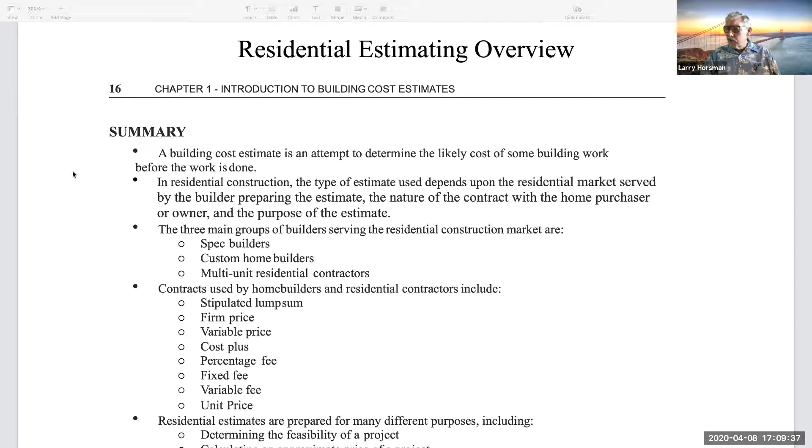Let's look at this residential estimating overview, hopefully you can see it. I'll be sending this out as a handout, so we're just going to go through it pretty directly. If you've got a small screen, you'll have a hard time. This came out of another book, the source is at the end, I believe. Yeah, Estimating for Residential Construction by David Pratt.

So not a brand new book. There's some web pages in here, some recommended resources. So NAHB, that's the National Association of Home Builders.

So what are we trying to do? Why are we estimating? It says a building cost estimate is an attempt to determine the likely cost of some building work before the work is done. So we're trying to predict the future. We also need to know why we're doing the estimate, because there's a lot of different reasons for preparing estimates. But we're talking primarily about residential construction.

In residential construction, the type of estimate used depends upon the residential market served by the builder preparing the estimate, the nature of the contract, and the purpose of the estimate. So we need to understand the contract because that establishes the rules under which we're going to have to work. Before you start any estimating, the very first question you should ask yourself is, why am I doing this? What's the purpose, what's the goal of the estimate? If you don't know what the goal is, there's no sense probably in proceeding at that point.

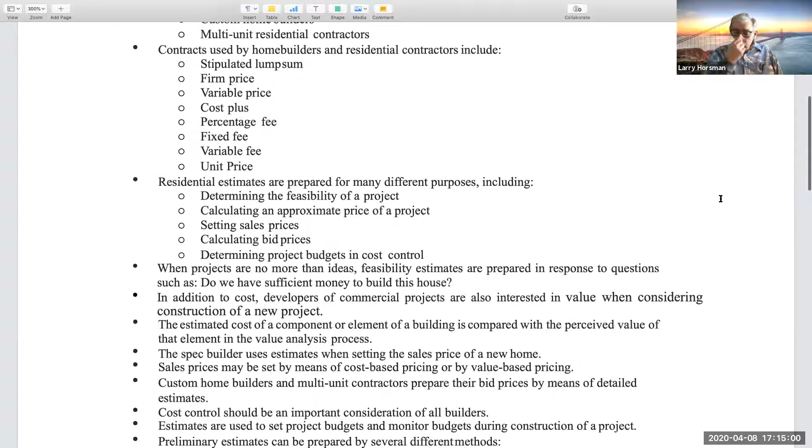So then we get to the heart of it. Besides the contract, why are we doing the estimate in the first place? Determining the feasibility of the project, we're not going to do a detailed takeoff. What we're trying to do is find out if the owner's budget and our expectation of project costs are anywhere close, and if they're not, there's no sense in going forward because the project's not feasible.

If we determine that the budget allowed and the expected cost, based on what information we have, look to be somewhat similar, then we can move forward and get into more detail.

Calculating an approximate price of the project is what we're doing sometimes, but that may be looking at options and methods. We may be looking at big elements, roof, walls, floor, concrete foundation, wood foundation, things of that nature. So trying to figure out a sales price. And how much do we charge for sales?

Anybody have an idea? 20%. As much as possible, right? Whatever the market will bear. So when prices are going up very quickly, it wasn't that long ago, prices have flattened out a little bit.

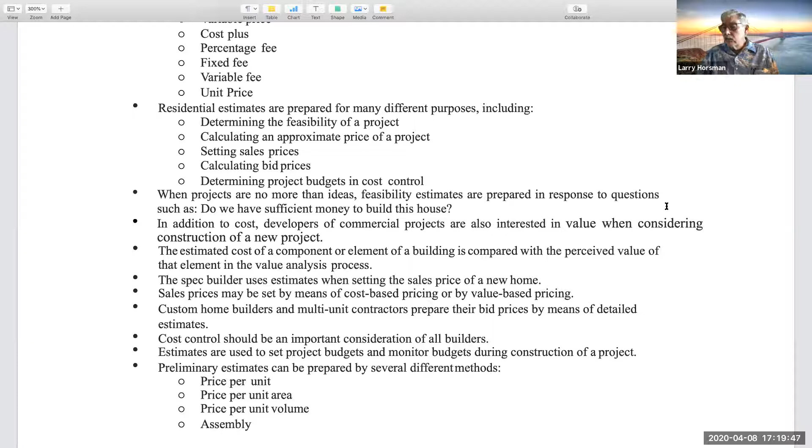So cost control, in order to do accurate cost control, we need an accurate budget. In order to do a detailed budget, we need to do a detailed takeoff. And preliminary estimates, though, we can do price per unit.

If I'm going to build a house, I know they're all about the same size. I just say, okay, X number of dollars. Price per unit area, often we're estimating on a square foot basis.

And I think here in San Diego, kind of average level, they're looking at construction costs about 150 bucks a square foot. Or if you're going to buy a house here in San Diego, I think it's around 250 because of the land prices a square foot. Over in El Paso, my daughter was buying a house. Most of the housing over there was running about $95, $100 a square foot.

Other places, it may be more. If you go to San Francisco, it's going to be a lot more. If you go to probably Alabama or someplace in the deep south, in most places, it'll be a lot cheaper. We can do price per unit volume, so they can have a cubic foot price.

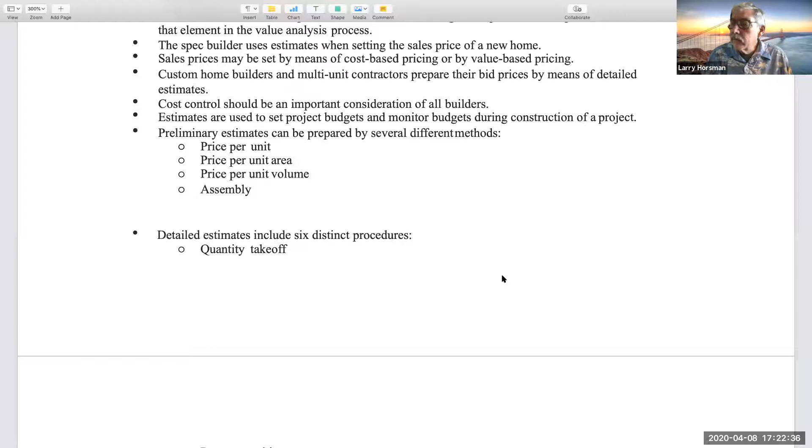So in order to come up with a cost and time, we need to know how much work there is. We need to know what the productivity is. And from that, we can estimate how much time it's going to take.

So once we've done the takeoff, we typically have a bunch of messy sheets. We have to recap the quantity. We have to come up with the material price, the labor price, and any equipment prices associated with that. Even on a residential job like these, there's a certain amount of things that just get lost, broken, used up that we have to account for also.

We have to price the general expenses. So that's kind of the job overhead. Do we need a trailer? Do we need a phone? Do we need a security fence? Do we have to have meetings once a week with the owner? Do we have to have meetings once a day with the owner? So those are general expenses.

And then when we're all done with that, we have to summarize, look at our overhead, and add some sort of a markup to make sure that we're getting the money that we want. So if we find out we can't earn the markup, the profit that we want, then we should probably go do something else, unless...

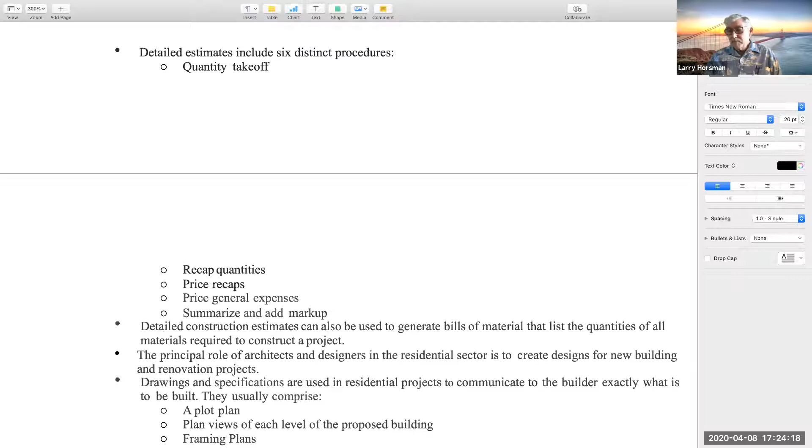There is an old saying, if you want to make a small fortune in construction building, the way to do it is to start with a large fortune and then go to work. And you can lose a little money on each job until you're broke. So, but not what we're trying to do.

So again, as part of the process, detailed construction— sorry, estimates. Guys. Hello? Do you have a question?

Detailed construction estimates, we're going to use those hopefully to generate bills of material that list the quantities of all the materials that we need to build the project. This is one of the reasons for doing the detailed takeoffs: everything that you forget or don't have a list for are things that probably won't get ordered and are going to cost you more money if you have to get them at the last minute or make an extra trip.

Much easier to have a detailed list of everything that you need, place the order, have it delivered, than to have to go pick up a whole bunch of odds and ends one at a time.

Architects and designers, usually—well, often—they're not particularly experienced in either ordering materials, doing quantity takeoffs, or cost estimating. But they create the designs for new building and renovation projects, drawings and specs.

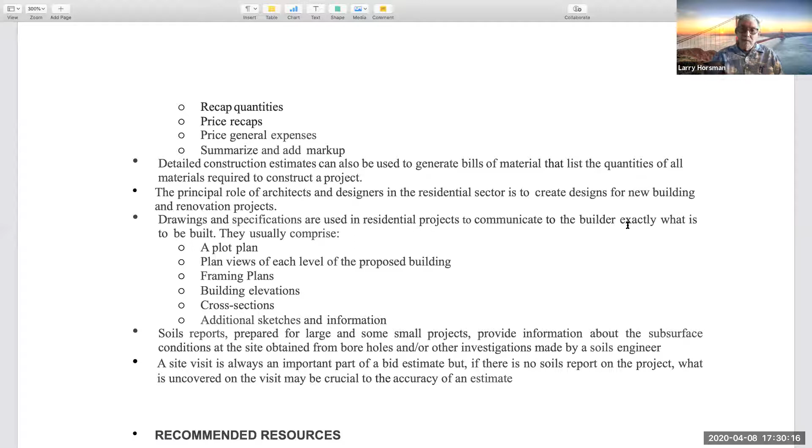How much does a soils report normally cost? Is it like $2,000? No, I'd say a cheap one is $3,500 to $5,000 typically. That's not that much time - somebody has to go do some research, meet with the client, put stuff together. Let's say you've got 40 hours in a soils report - somebody's got to type it up, you're running some lab tests. So 40 hours doesn't sound like a lot. You're probably paying an average of 100 to 200 bucks an hour for that, right? So 40 times 100 is 4,000, 40 times 200 is 8,000. And so people opt not to do that.

Now, sometimes the building department will come back and say, we know there's some sort of problem in the area, you're going to have to do a soils report. Or the inspector comes out while you're trying to get a foundation inspection and says, those big cracks in the ground, that's expansive soil - we need you to go get a geotechnical report for that. So it stops your job, plus you're going to have to do some extra stuff.

So getting out of the ground - now, on the other hand, the contractor may come back and file a claim for what's called a changed condition, saying, oh, you told me everything was going to be fine. Now we've got all this new information from a geotechnical report - or in some cases, because they only looked at 4 or 5 little spots on the lot, maybe they didn't find water, but where they're digging, they go down a couple feet and find a bunch of water. Now they've got to do something about the water in the trenches, and that can get expensive. If you're going to dewater and go to the Regional Water Quality Control Board, if you can't put it in a public sewer, it's going to cost you $30,000 to $60,000 to hire a hydrogeologist and figure out whether you can pump that water out and what you have to do with it.

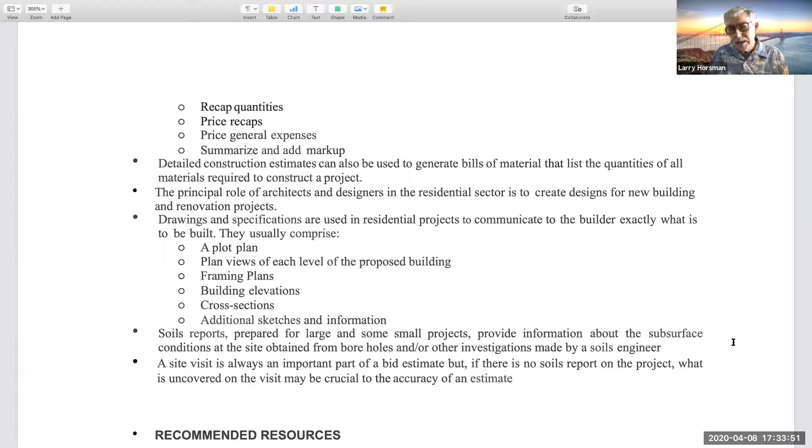They decided to proceed along. Last time I heard, they had abandoned the project. They'd spent a bunch of money, got a bunch of equipment out there, and found out there was indeed a big shelf of granite. It started at the surface and went down, so it blew the budget for the entire project, and they had to abandon it. So that's one thing you're looking for.

Another is looking for access. Can you get in and out of the site? Some places are fine when it's dry, but I've worked on jobs where the concrete truck came out after a rain like we had last night and sinks up to its axle, or rolls over. That can be a bit of a problem. You can have power lines that don't provide adequate clearance if you need a crane or something.

You may have drainage facilities that you have to deal with. There may be paving issues. So lots of problems only become evident after you do a little bit of research. Usually you have to look at the legal descriptions and look for easements, and there's a whole bunch of things that you may need to look at.

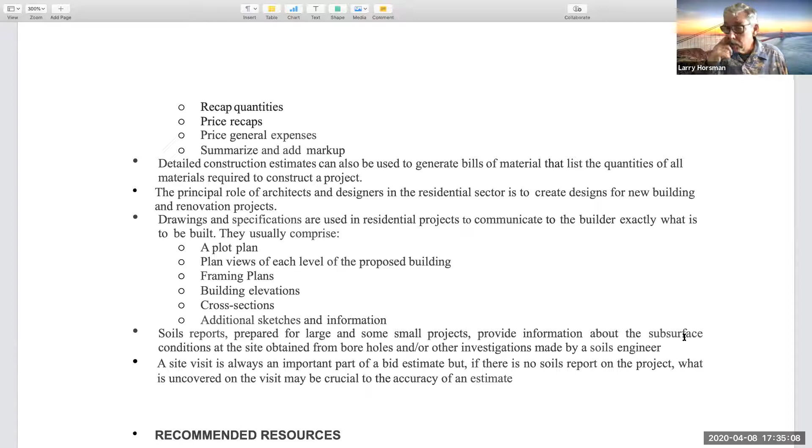And so that kind of puts a little bit of that, I think, in perspective. But the most important thing is, why are you doing the estimate? That's the first question you need to ask.

If it's just blue sky, we're not going to do a takeoff. We just want to know about how big, and does it make a difference whether you do 8-foot ceilings or 10-foot ceilings? Yay or nay? Yeah, because the higher you get off the ground, the lower productivity is. And also you've got 25% more surface area for the walls going from an 8-foot ceiling to a 10-foot ceiling. You'd be surprised at how much wall surface area there is in a typical house.

So does it make a difference whether you use tile or whether you use comp shingles? Yeah, tile is generally 2 to 3 times as much as composition shingle, although it's heavier, so you're going to need more structure. Although there are designer composition shingles that are very pricey.

How about a copper roof? Think that's cheap? Nope, that's very expensive. And you can't just get anybody to put on a copper roof typically. You need somebody who's experienced.

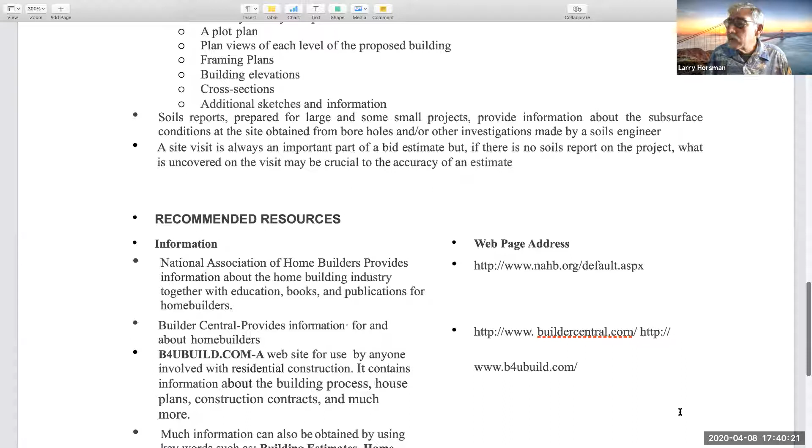But anyway, I'm going to send you a copy of this and I'll ask a few questions on it. The number one thing before starting any kind of estimate is: what am I going to use the estimate for? If you don't know what you're going to use the estimate for, I don't know how you can even start doing an estimate.

This class, though, focuses on quantity takeoff, because in order to start coming up with how much work and how much that work is going to cost, somebody has to do a detailed breakdown at some point. But if all you're going to do is conceptual estimating, you're not going to be doing any of this stuff—you're just looking at some very general parameters.

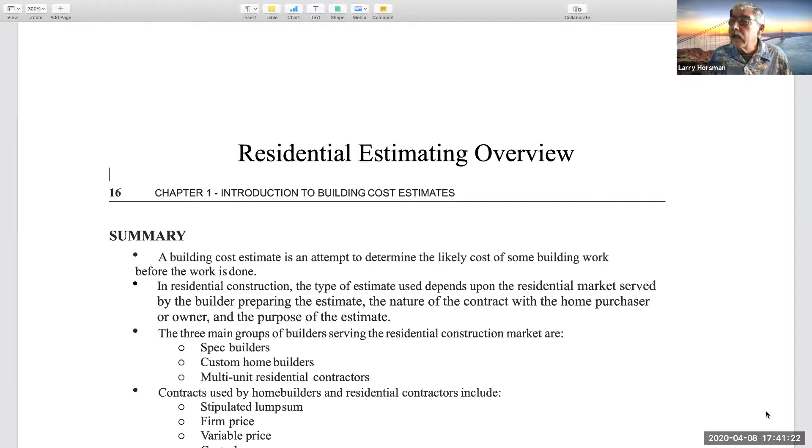So what we're looking at is fairly small. I don't know if that helps or hurts. We're talking about providing a little more structure, so I think I can get rid of that.

There you are. And we can look at—let's see if I can get my IPEVO up. So we'll go. Any questions? Anybody still awake?

I'm still awake. I appreciate that. Excellent.

Have we done a total cost for the foundation of the first house yet? I don't think so—I will put together a price breakdown for that, and then you can see if you agree or disagree. It'd be nice to know what the cost was to have a number. Yeah, I'll have to sit down and work on that based on the quantities, and you have to make some assumptions too.

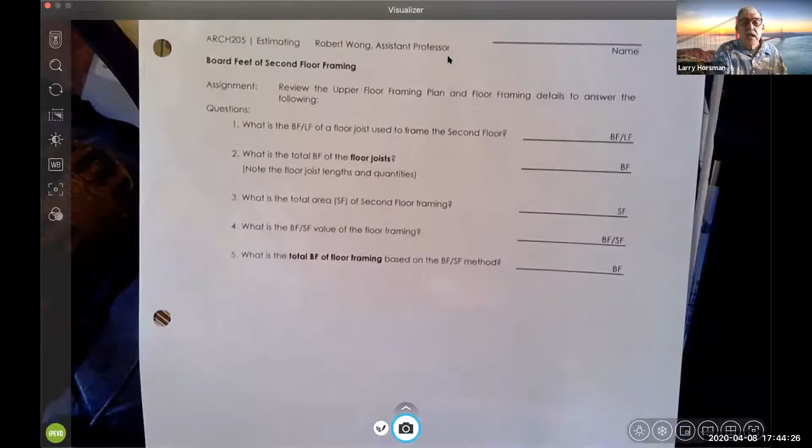So we did have this board feet of second floor framing, so I don't know if everybody's done that. We're gonna look a little bit at that.

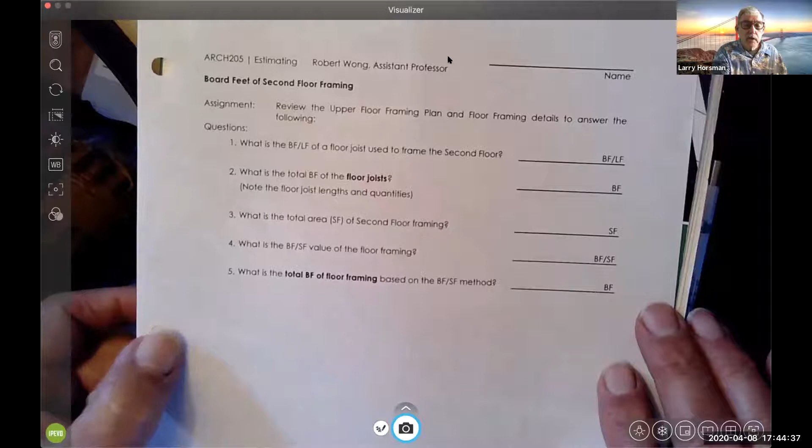Also, I brought this into class, and I'll put together a couple more handout things from this, but this is organized in a very similar way to your book. This is the standard estimating practice for the American Society of Professional Estimators.

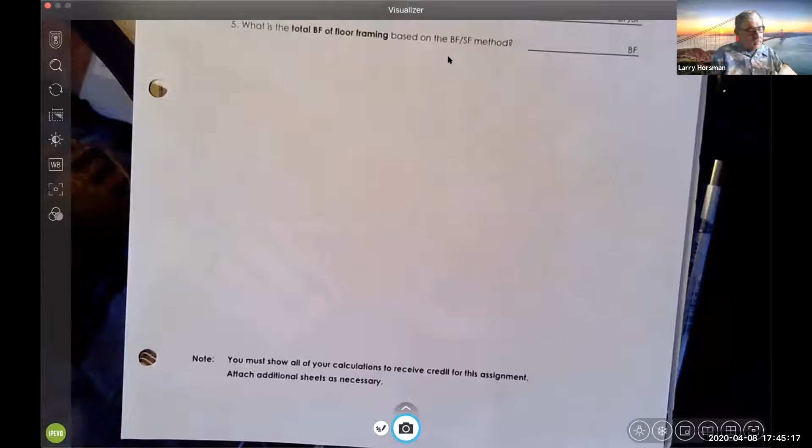Okay, can you see this sheet? Yep. Okay, hopefully—let me get this thing out, I've got something else floating on my screen if I can move it. Maybe there.

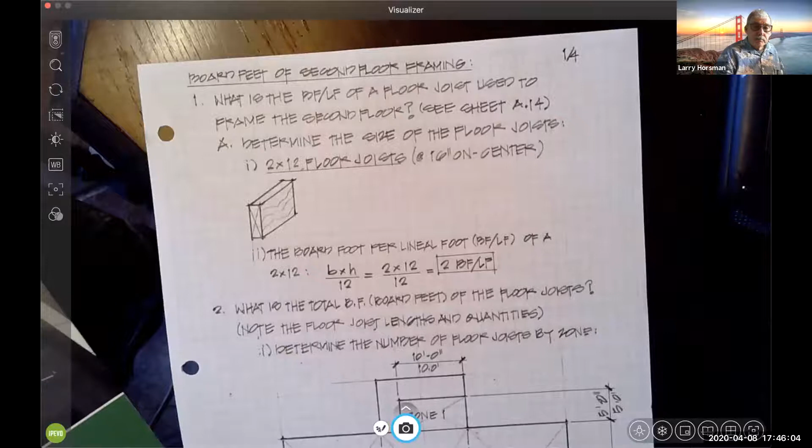This lag is starting to bother me a little bit. But this is board feet of second floor framing, a calculation associated with that other sheet I gave you.

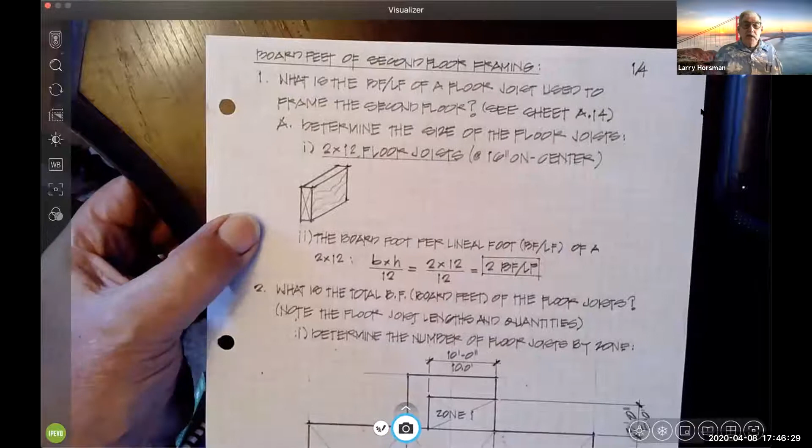So you see A there, determine the size of the floor joist. So our floor joists are, if we look at the plans - has anybody looked at those plans? Yeah, so if you look at the plans, we have 2x12s at 16 inches on center.

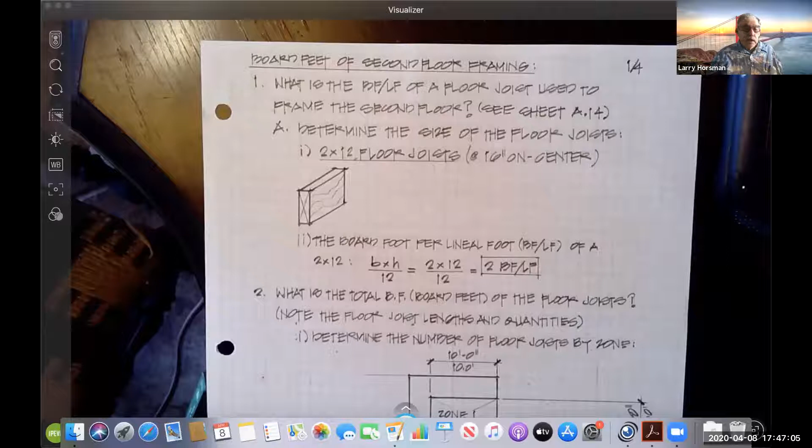So board feet per lineal foot, there's a table in your book. But what we do is take the nominal cross-sectional area, 2x12, divide by 12, and that gives us 2 board feet per lineal foot. So next thing we're trying to calculate is total board feet of the floor joist.

Is that your handwriting? No, are you kidding me? Sorry, I was gonna say that's pretty awesome. It is pretty awesome, this is Robert Wong, and Robert Wong has the best hand lettering of anybody I know. Yeah, it's pretty cool, that looks like it was done with a machine. So he has the best drafting. So I draw, but I am somewhat envious of his skill when it comes to lettering, but he uses a straight edge and I'm in a hurry. I get paid by the hour.

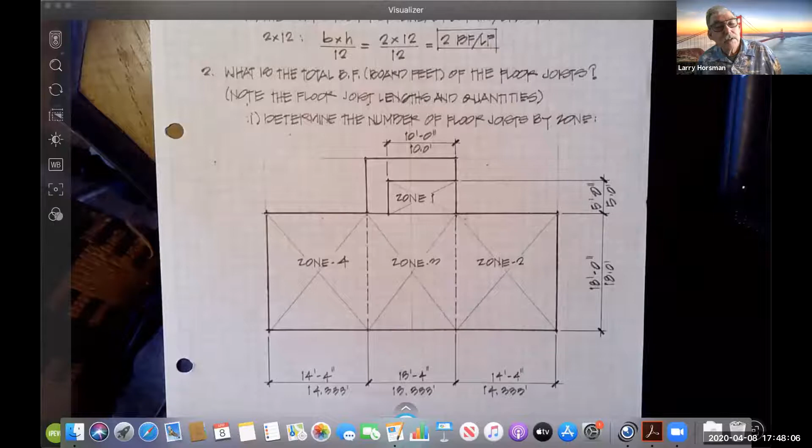So anyway, this is our floor plan, the little schematic. You know, right here is that stair area.

And he's broken it up into zones, right? We've got the 14 feet 4 inch, 13 feet 4 inch, 14 feet 4 inch, 18 feet going the other direction, and then we have that little stair tower. So he's broken this up into 4 zones of floor framing. Zone 1 is just a little piece over there near the stairs. Zone 2, 3, and 4 are part of the main floor.

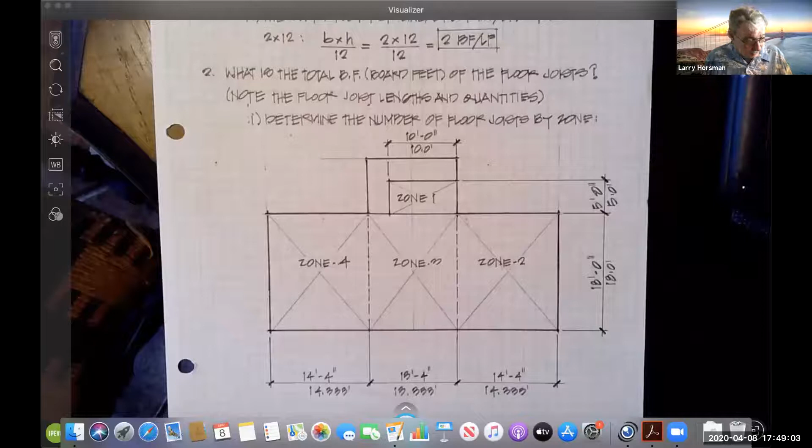So any questions on that drawing? Other than how come I can't draw like that? So somebody else would like to point out that my drawing sucks. That's ignoring the beams that are in zone 2 and zone 4, right? Yeah, we're just looking at the floor framing now.

So typically what we'll do is start with the big stuff, and then we'll come back and look at the individual beams.

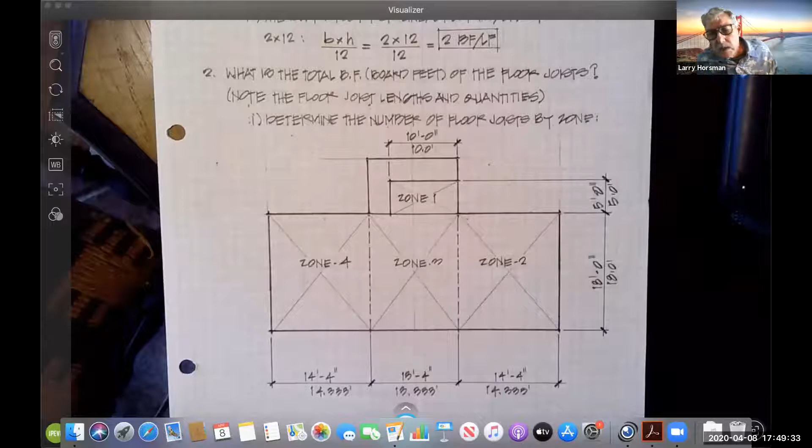Okay, things that we might look at in addition with the individual beams - if they're flush beams, they're going to have hangers on them. If they're drop beams, then we run the floor joist over the top and we don't have the hardware associated with it. But the other thing that may come up is if we're going over a wall, we may have a lap if we're breaking these up into small pieces. And so the code normally calls for a 6-inch lap or a 1-foot lap if you're lapping them over a wall, and that impacts the total span.

So anyway, this is for our house, and I haven't checked these numbers in detail, but I will make a copy of this and send it to you. And I will get that done tomorrow.

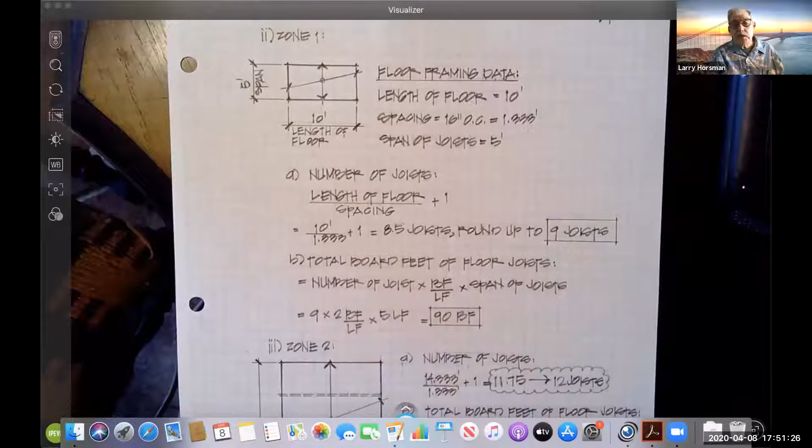So up here at the top, again, there's a couple things you should know. What this is missing is if you're doing a takeoff sheet like this, it should have a date on it, because sometimes addenda get issued, or perhaps there's a change order, and you need to go back and see if it affects the work you've already done. It does have a sheet number, so this shows sheet 2 of 4 for this particular takeoff. Normally, I like to have a job name and what the takeoff is for on there.

But you see that we're first looking at zone 1, so that's that little 5-foot by 10-foot length of floor. So spacing 1.333 feet - and if it was me, I would not use 1.333. Why?

That's 16 inches, that's a repeating decimal. So 1.33 is close enough for me. I don't think the degree of precision warrants 3 decimal places, but that's okay.

Span of the joist is 5 feet. Now the problem though is, when we buy those joists, how long are they actually going to be? They're going to be full length. We'll either buy 6-footers because they don't sell 5-footers, or we'll buy 10-footers and cut them in half. So those are our options.

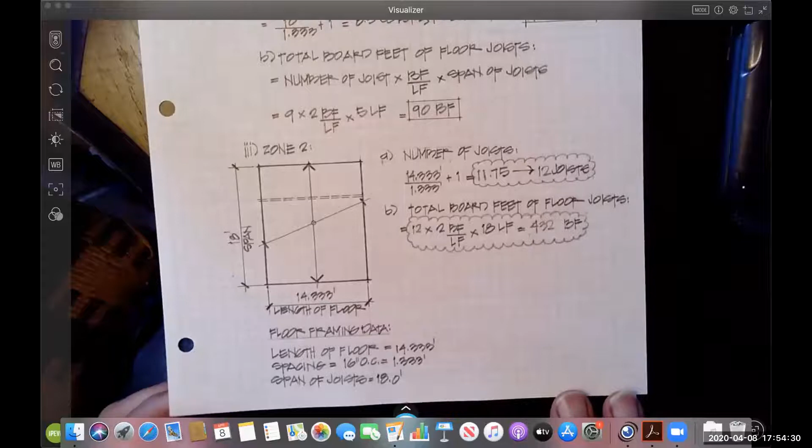And again, where'd my sheet of paper go? My other sheet - oh yeah. So zone 2, it's over here on the right. And that's what this next calculation is for.

And we have number of joists, so where the joists span top to bottom of the rectangle, they're being spread out over the 14.33 feet. Again, like I said, I probably wouldn't use the 333, but hey. So number of joists: the 14.33 feet divided by the spacing plus 1 is 11.75. Round up to the next even joist, we get 12 joists.

Then if you're looking for the total board feet of the floor joist, it's 12 times 2 board feet per lineal foot times 18 lineal feet. That's 432 board feet. So, again, this is an exercise just for computing how many board feet there are.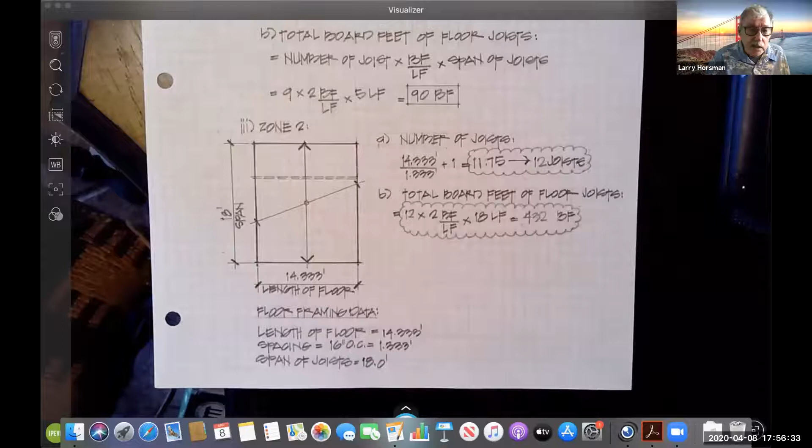Normally on a project like this, we would just figure out the length of the joist, the quality of the material - is this Doug fir larch number 2, number 1, select structural? So we need to know the specifications of the material and the lengths. And we just pay a price per each, but that per-each price would be based on the board foot. So normally this isn't a calculation I would send off to the lumber company - they just want to know how long, what kind of wood, and how many.

So any questions on this little calculation? Yay? No. Nay? Okay, good.

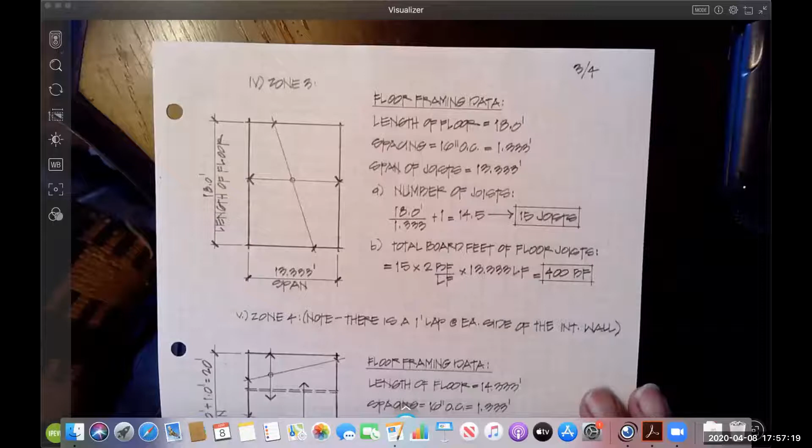So now we're looking at zone 3. So floor framing, again, 18 - this is that center section. So spacing, span of the joist, number of joists, total board feet. Same as the little area we did before, and then we have zone 4.

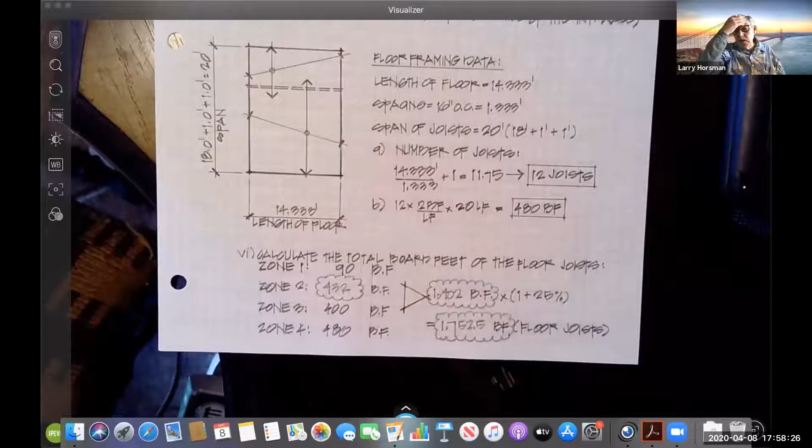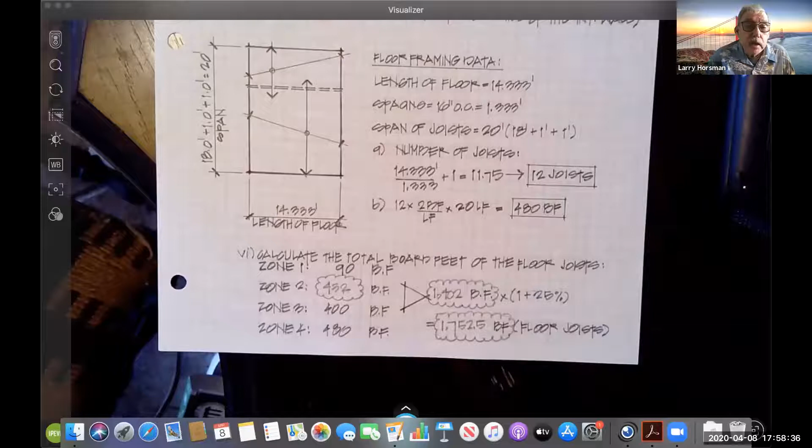And here's the calculation for that. Again, I'm not sure why they're breaking the joists, but they are, according to this picture. So again, what you're trying to do is a takeoff on how you think you're going to build it. Here they're showing the short joist near the top, and longer joists down below, and that's why they're counting the lap - they're showing a 1 foot lap over that interior bearing wall.

So, number of joists, board footage calculations, and then they're counting up, coming up with a total for all of the zones.

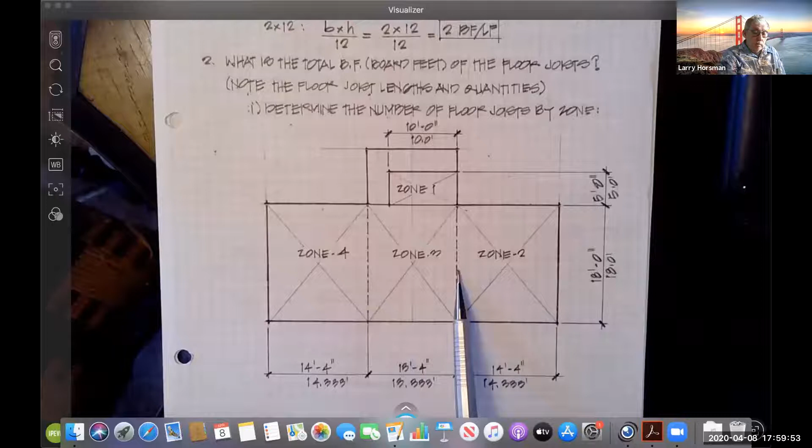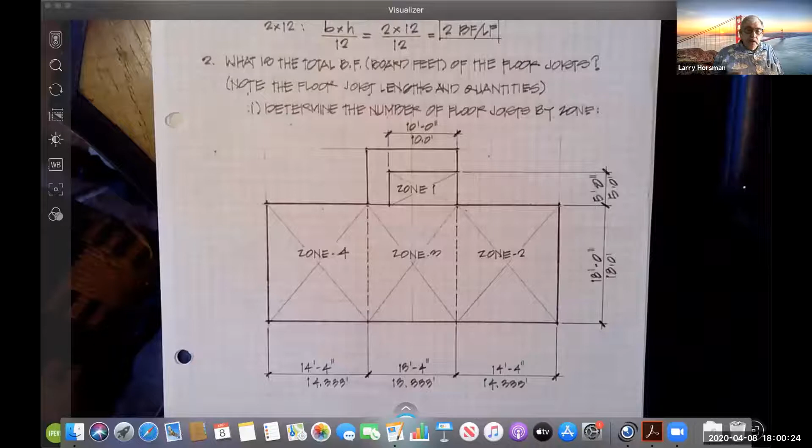Doing it the way we just did it, we're gonna count two joists, because when we break it up into zones like that, we're gonna have one extra joist between zone 3 and 4, and we'll have one extra joist between zone 3 and 2, because we have counted that edge joist twice in our calculations. We calculated it once for zone 2 and once for zone 3. And then at the boundary between zone 3 and zone 4, we've also counted that joist twice - at the left edge of zone 3 and the right edge of zone 4. Any questions on that?

Yay, nay? That's helpful to see. Okay.

Well, I was trying to take some of the feedback and incorporate it.

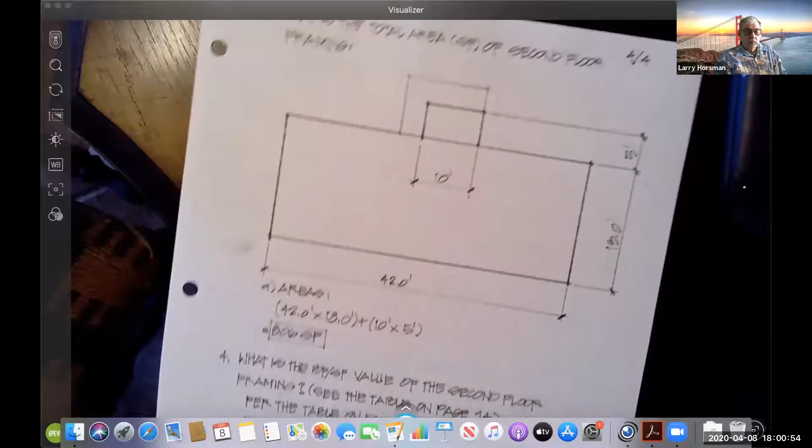So the total area square feet of the second floor framing, which we're probably going to need to do for plywood or OSB takeoff. We have the 18 by 42 plus the 5 by 10, so we get a total square footage of about 806 square feet.

Last time we were talking about those board foot per square foot values on page 14 of the text, and that's what they're showing here. Let me see if I can.

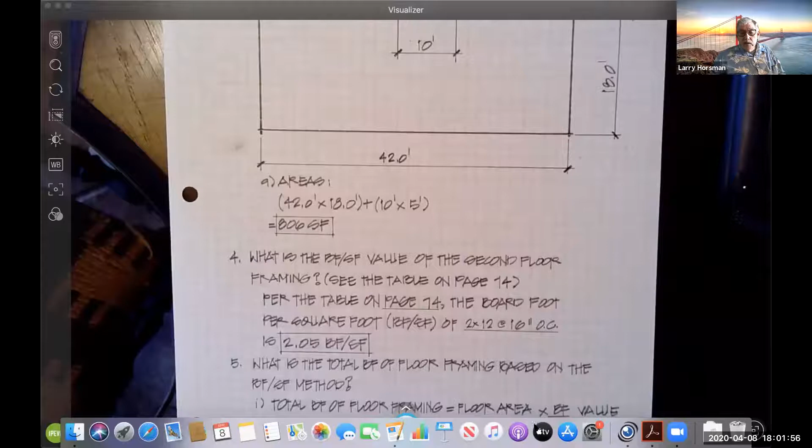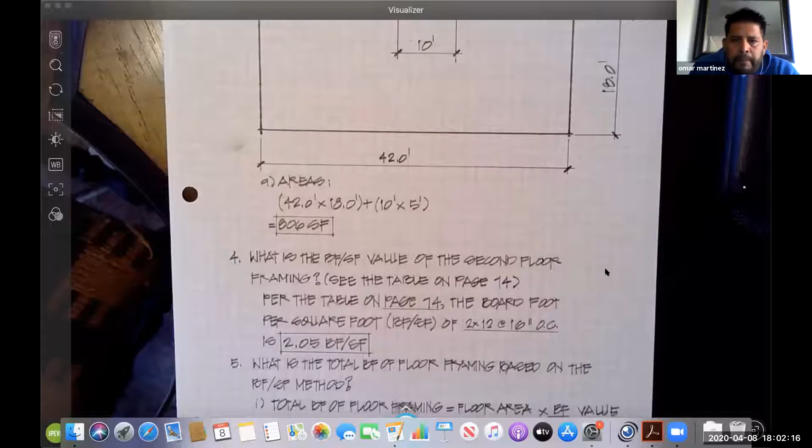So we're doing the same with the concrete, using a different method. This is quicker. Let's say all we want to know is a general idea. We're just looking at the floor itself, and we're not going to order anything, but we're trying to do just a quick estimate based on preliminary plans.

We can say, yeah, we're going to have 2 by 12 floor joists. We can look in the book. If we look on page 14 of your text, we can see that normally 2 by 12, 16 inches on center is about 2.05 board feet per square feet. And we can come up with a total based on that too.

With the floor, are we just doing the joists or the beams too? Right now, just the floor. We haven't done the beams yet.

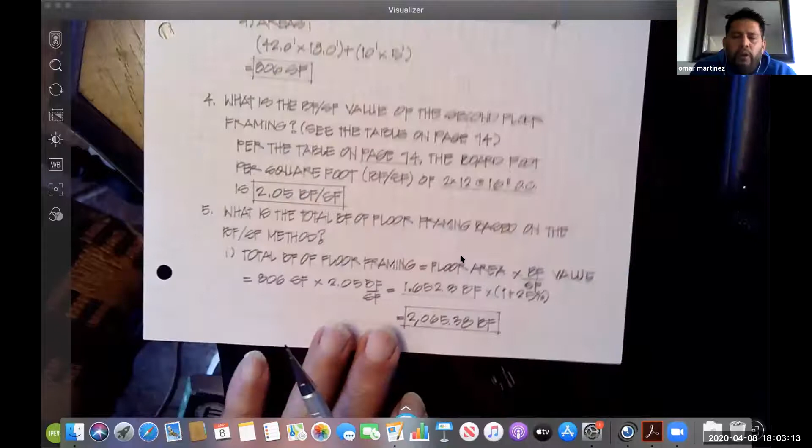What was the board foot cost, I missed that last lecture. We didn't have a board foot cost there. Now I sent you, hopefully you got that thing I sent you, I think after our last class. I think it was 5 sheets out of the cost estimating book.

You can say no, that's okay. I do not remember that one. Okay, well, maybe I didn't send it, but I will. I'll go back and double check.

Anyway, those 5 pages we went over in class that had the cost data in it, there's some price per board foot. So that was, as I remember, $860.05 per 1,000 board feet.

And so, for example, if we had 2,065 board feet, I've got a calculator here, I think.

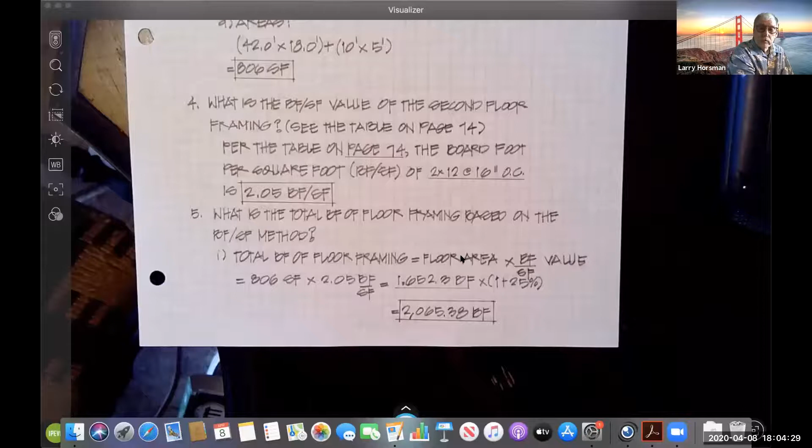Yeah, we got the pages in the email. Yeah, I thought I did, but like I said, I'll double check.

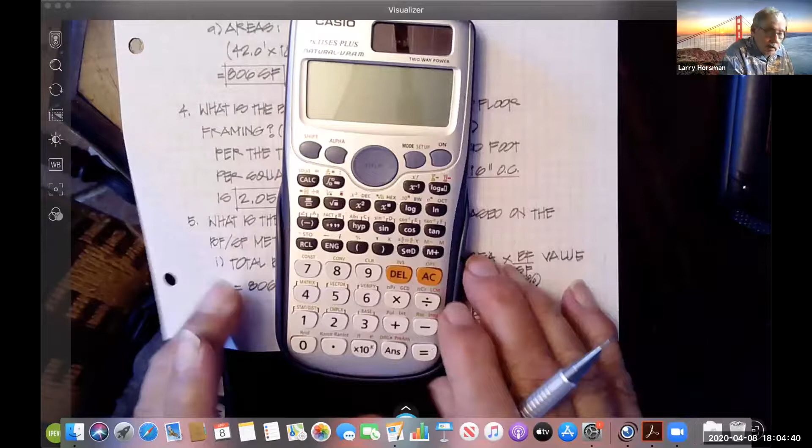So here we've got, let's see if I can turn this on. Maybe, there we go. 2065, I'm not going to worry about the 0.38, times 860.05, divided by 1,000 board feet.

So that's about how much the lumber would cost. It's about, and what does that look like? That looks like American independence all over again, 1776.

So now what else would we have to pay in addition to that? Would we have to pay tax on that? 10% too, right? Yeah, so you'd have tax, which depending on where you buy it, is probably somewhere around 9%. 8.75%, I think it's 9.25% in El Cajon. So, 1.09.

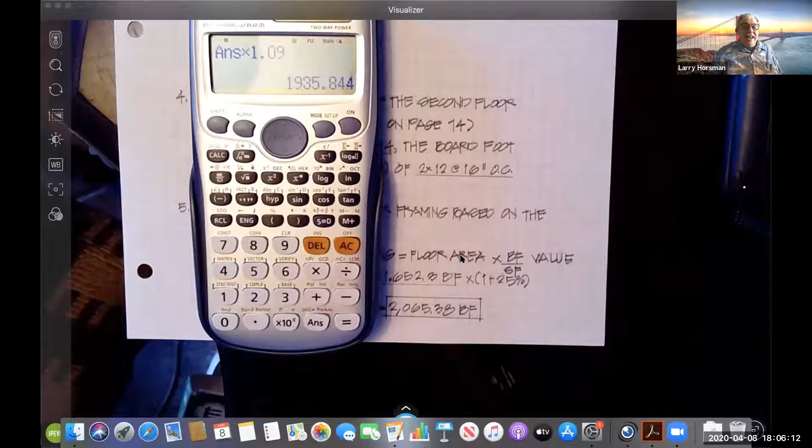Now we're up to 1935. So you see, if you forget the tax, we already lost about 160 bucks.

And then, do we get it for free, or are they going to charge us to deliver it? So we'd also have some amount for that delivery. But that's how we would get a quick price.

But if all we did was this calculation, we wouldn't know how many joists we need. We wouldn't know what lengths they were. And so from a project management or detail standpoint, if we're doing the work ourselves, that's not going to help us too much with planning the job. But if all we're trying to do is get a quick price to see if we're in the ballpark, or to check our sub's price if they tell us it's costing a certain amount of money, this is probably fine. If we're somewhere in the ballpark, we'd probably say okay.

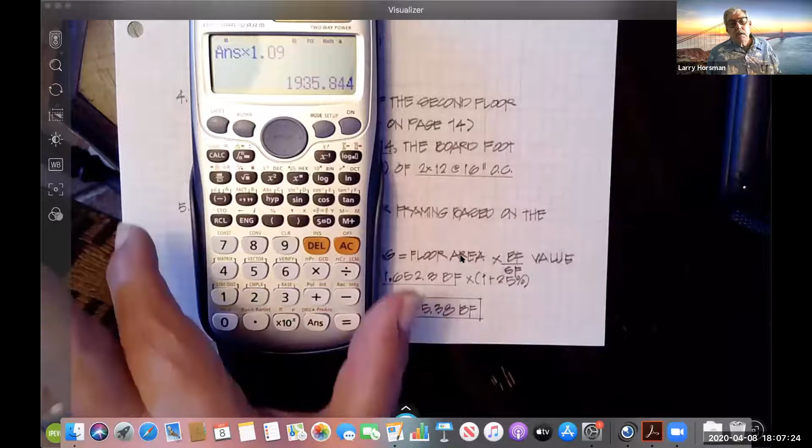Now on this calculation, we're also using right here, that's a waste factor. And again, I wouldn't use 25%, I would go 1.25, because that's what 25% is. But that's how they got to the 2065.

So if you don't allow for waste, we're going to be short about 25%. And that's where we start getting eaten alive with our construction cost. If you miss 25% on your material cost, we've got a lot of problems when it comes time to charge somebody. So that is, I think, that cost. That takes care of the second floor framing.

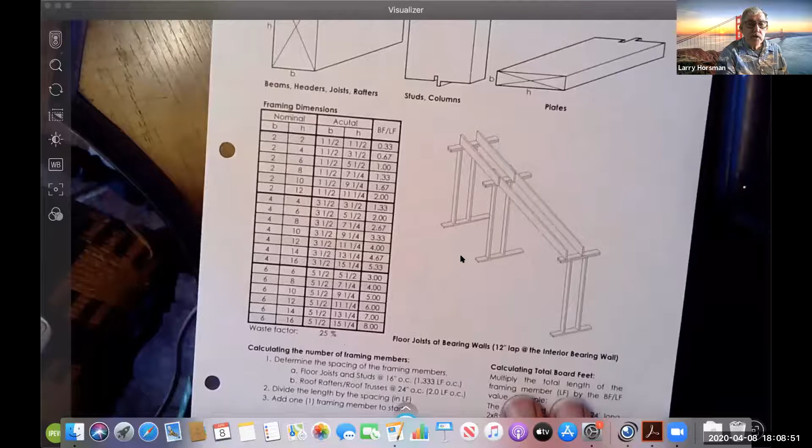Now in your book, I'll make a copy of this too, but I think some of this information is in your book. There's a little bit of a time lag when I put these up.

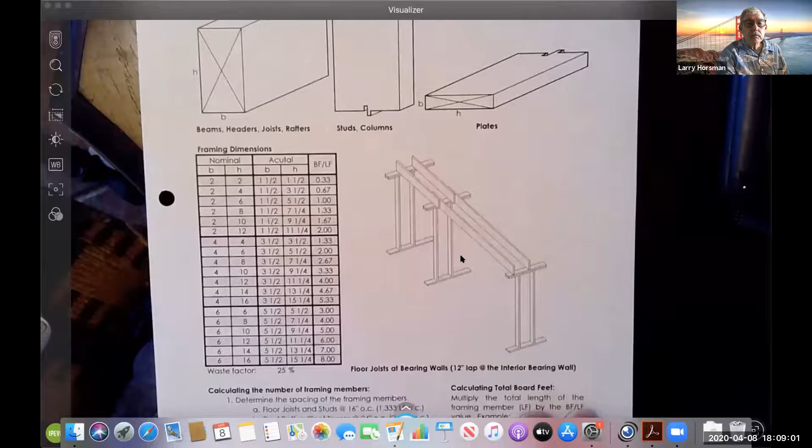So over on the left, somewhere, right there, those are the nominal sizes. B is the width. If you look above, you've got some pictures showing B times H, and they tell you how many board feet per lineal foot there is in different sized boards. Now I know 2 by 6 is 12 divided by 12, that's going to be a board foot per foot. 2 by 12 is 2 board feet per foot.

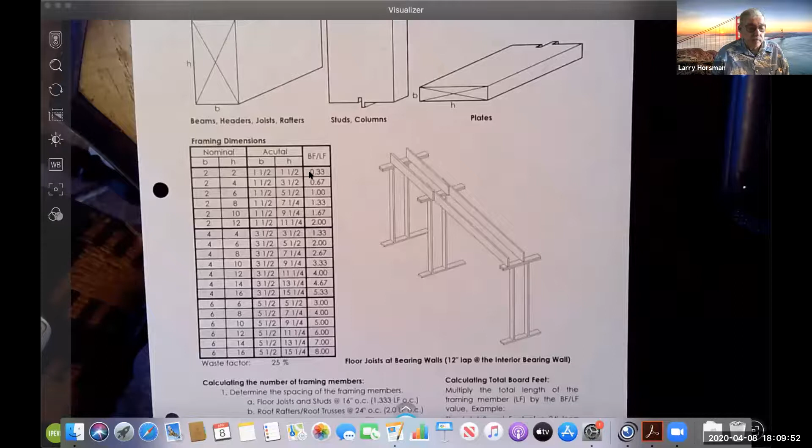So normally if I'm using these for estimating tools, I'll verify a couple of them myself. Cross-sectional area of a 6 by 8: 6 by 8 is 48, divided by 12 is 4. And if you look right here, you'll see the 4 board feet per lineal foot. So that particular column for different size boards, they've already done that calculation for you, so you can just look them up. I'll send you a copy of that.

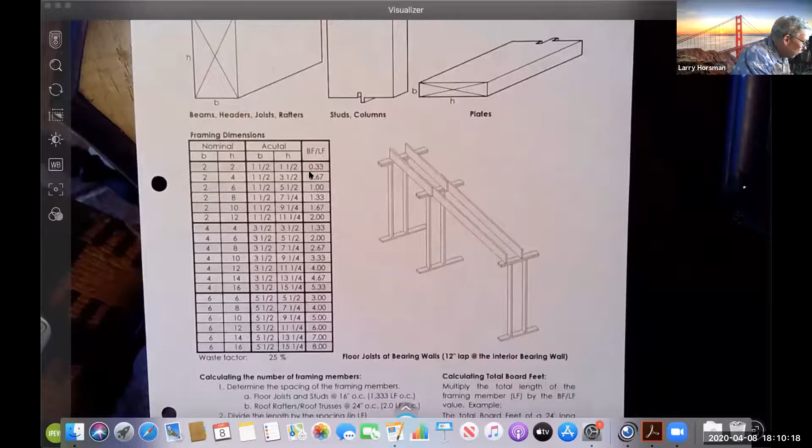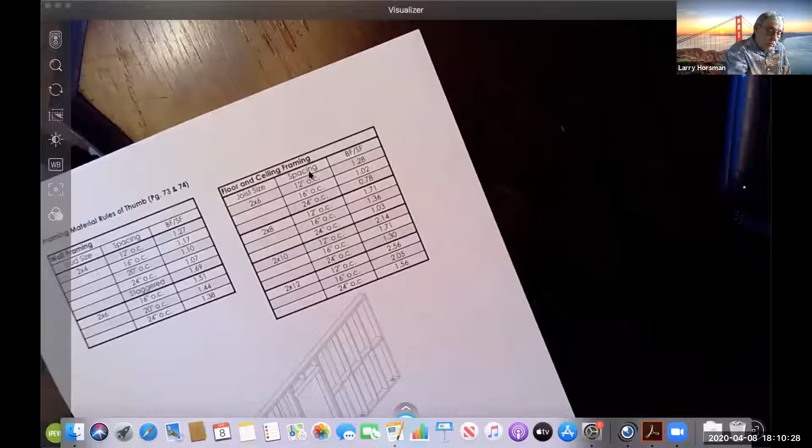If I had a faster computer... okay, it's a little crooked.

Again, if you look at the top upper left-hand corner, framing material rules of thumb. This is from page 73 and 74 of your book. So they have stud size, and 2 by 4s and 2 by 6s, they have spacing, so 12 inches on center. And on the far right column there, they have the board feet per square foot.

And that's another way of coming up with an estimate where you look at the height of the wall, the size of the studs, the amount of top plate and bottom plate, blocking if you have it, and then you can come up with a rough board feet per square foot. If all you're trying to do is get a general idea of how much lumber is going into the building, you can do that, but it's not going to help you when it comes time to order because you won't have made that calculation. But if your goal was just to get a general idea of how much lumber you need, so you can come up with a ballpark price for something, you can do that much more quickly than doing a detailed takeoff.

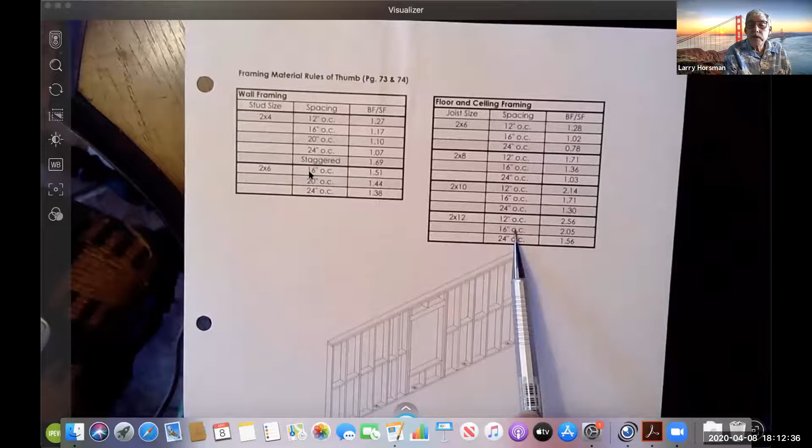And the little column there on the right, that's also out of your book, and that's for floor and ceiling framing. If you look down at the bottom, right here, 2 by 12, 16 inches on center, here's that 2.05 board feet per square foot for the floor frame. That's where that number came from for the calculation we were looking at, that 2.05.

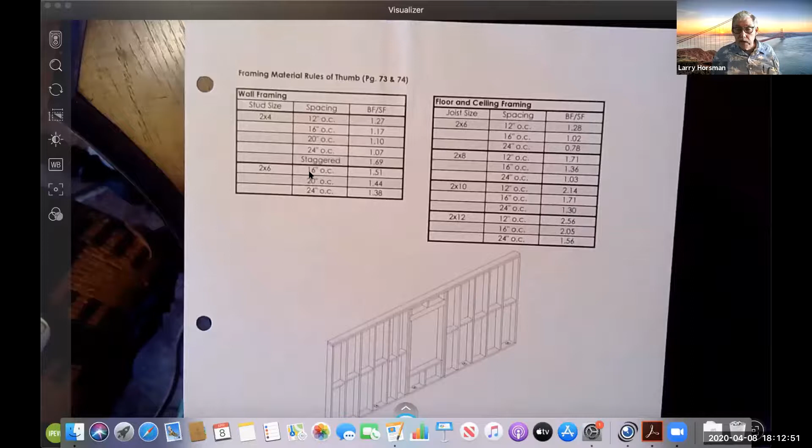Excellent. So wall framing.

Again, if you have a BIM model and it's drawn and you've drawn all the studs in there, you can count them, you can count every piece of lumber if you have a complete BIM model. But there's always going to be a waste factor. It's usually fairly high for studs. Sometimes we have to block when we get stud spaces of 10 feet or more, you're required to put mid-height blocking in there. Usually that's not shown on the plans because that's a code requirement and they expect the contractor to know the code.

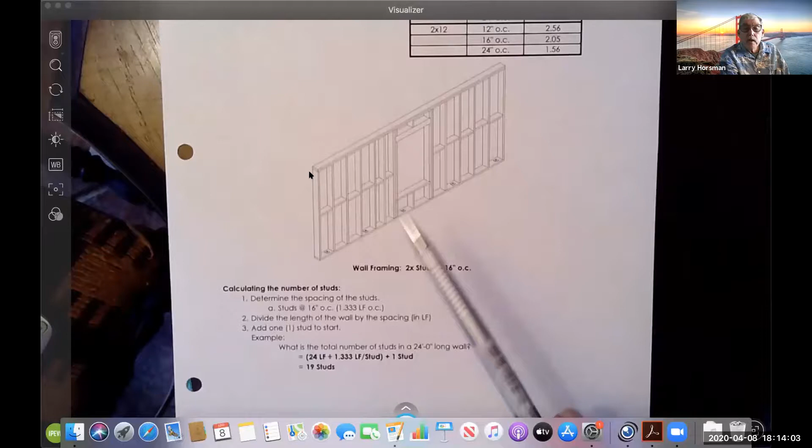And here at the window, you can see that while we don't have full height studs where the opening is, at the side of the opening we've had to put in an extra trimmer, which means we've cut a stud down for that header. So usually you just ignore the openings unless they're very large, and figure that you're going to use studs as if there were no holes in that wall. Double top plate.

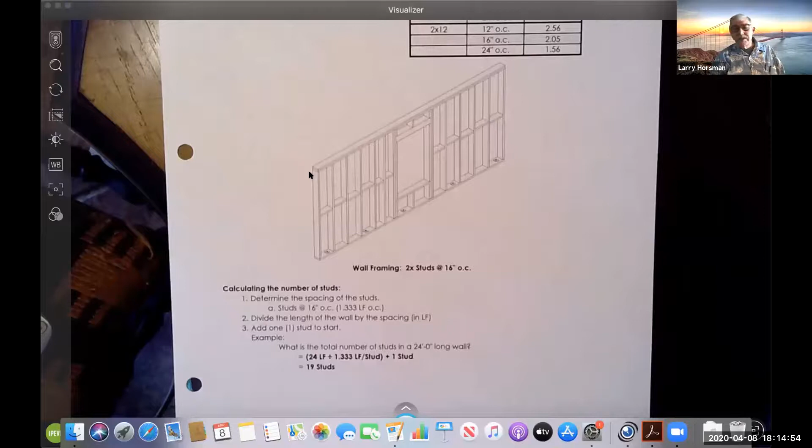So any questions on that picture? Yay, nay? Anybody still with me? Maybe. Yes, we're here. Oh, okay. I think you're all at a bar having a party somewhere. Yeah, probably all sitting side by side, enjoying yourselves. That's not allowed, Larry. Oh yeah, I know, we're gonna get citations now. Yeah, well, that's what I heard.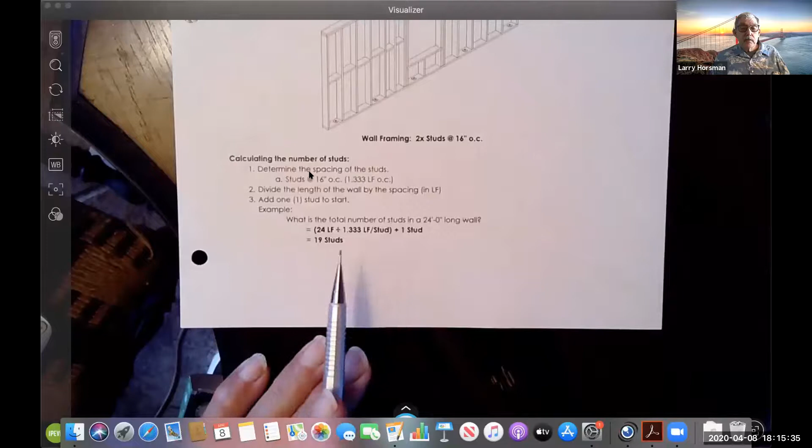So if we had a 24-foot long wall, here's a little example: 24 feet. We're trying to find the number of studs. We divide that 24 by 1.333 feet per stud — I would not use 1.33 — so that's lineal feet per stud.

Plus one stud to complete the end of the wall, you'd have 19 studs. At the corner, we add a couple studs to the corners and wall intersections because those are typically built up. We might have some posts, but we'd have to look at the plans. Again, if all we're trying to do is get a general idea of how much lumber we're going to need, we can use that board feet per square foot, come up with a number, see what they're charged, what the 1,000 board foot price of studs are, and come up with a material cost. But we do not have a list of what we need, just a number, a quantity we can use for getting quick cost estimates.

So any questions on that sheet? Yay, nay? No questions. Okay, that's good.

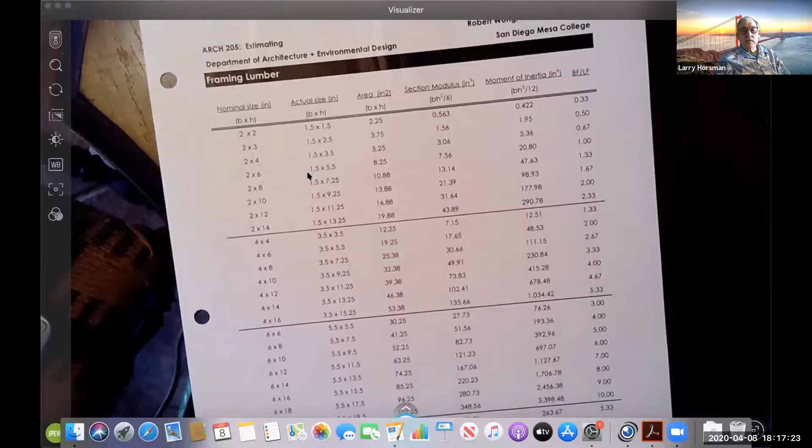And I can send you a copy of this too. Though I think this is probably somewhere in the book, and I have to go back and take a look. As an engineer, I use these three columns:

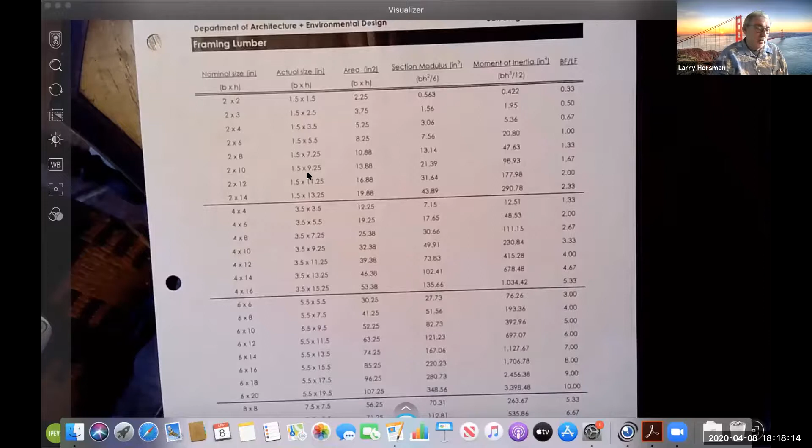the area, the section modulus, and the moment of inertia. So the cross-sectional area is used for shear calculations. Section modulus is used for bending or strength calculations. And the moment of inertia is used for stiffness or deflection calculations. But you'll notice, depending on the size of these things, over in the far right-hand column, they have calculated the board feet per lineal foot. And I'm sure you can get a database or an app that does all of this too.

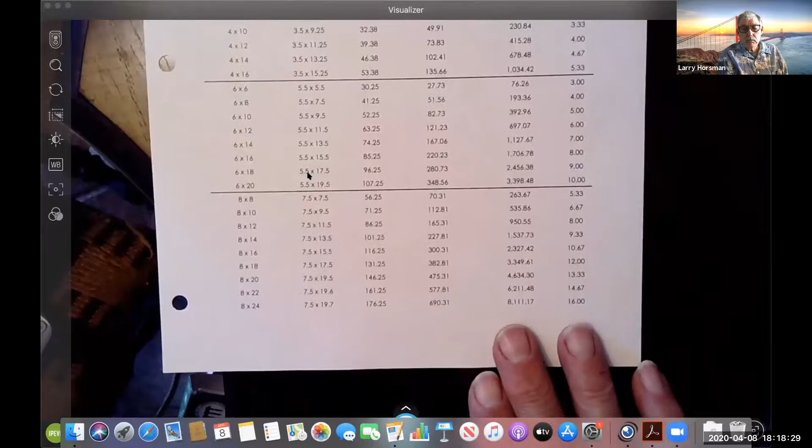But this goes into some pretty big timbers. So if you want to order an 8x18, is that a big beam? Normally not readily stocked. Normally they don't stock anything larger than an 8x16 at the lumber yards. So typically, anything larger than that becomes a special order.

And special orders, normally you have to pay for when? Upfront, when you order. An 8 by 24, most of the time, when I see people using some of these great big beams, they're doing it for architectural effect. And there are a couple of places that sell used lumber. So a lot of these big timbers come out of old barns, old bridges, old railroad trestles.

So, anyway, any questions on this particular sheet? I'll send that to you. No, thank you. Okay, let's get that to you. I guess I can send this to you too. I think this is out of your book, isn't it?

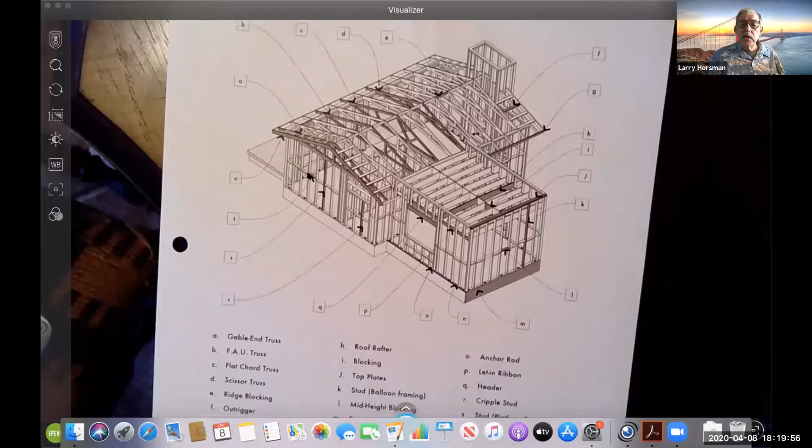Basic framing elements. Now this one has a truss roof. And so there's some terminology that you need to use.

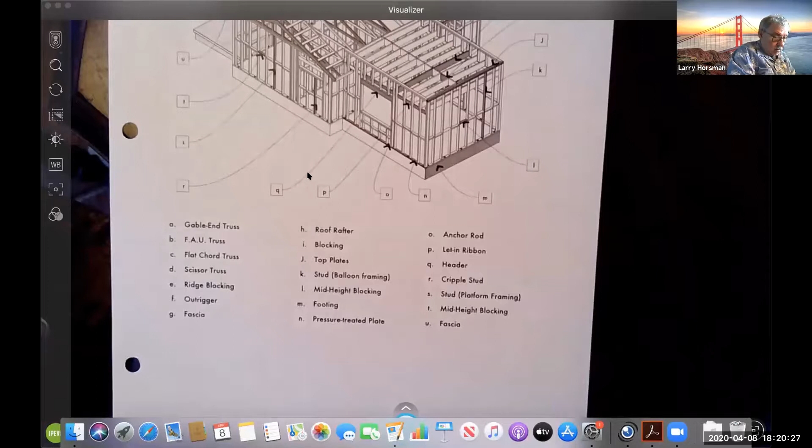And I passed this around in class, I believe, at one time. You can see it's a brand new book by that computer monitor. But I have a number of these construction dictionaries because there's lots of terms that I'm not sure about when I talk to other people, and so often I have to look these things up.

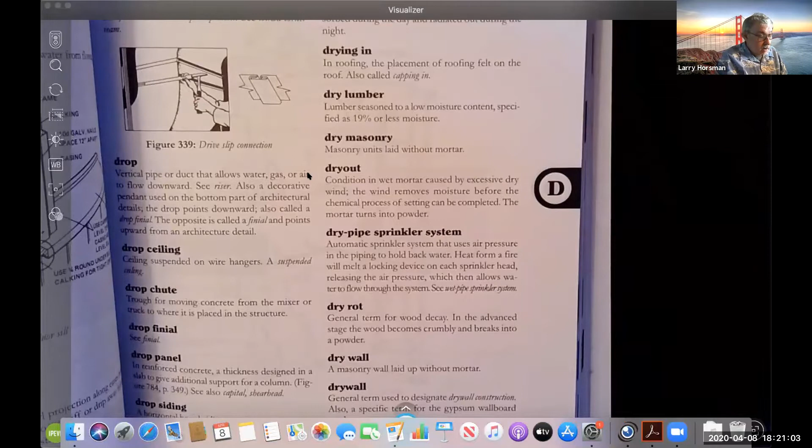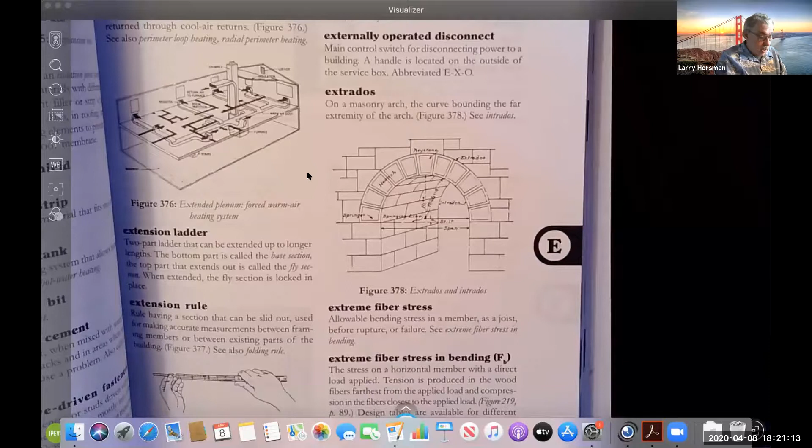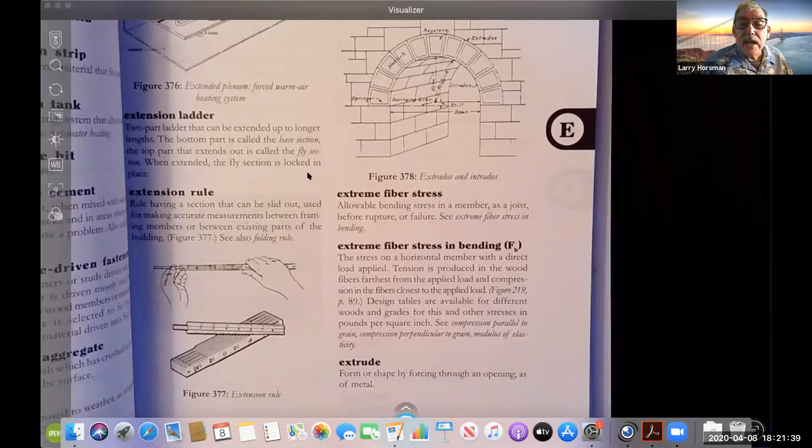And there's an engineering term. We were just talking about bending stresses, right? I give you a little something in there. And if you're an architect and you're going to take an architectural exam, they may ask you questions about this stuff, which is the extrados and intrados. So all of the terminology for an arch.

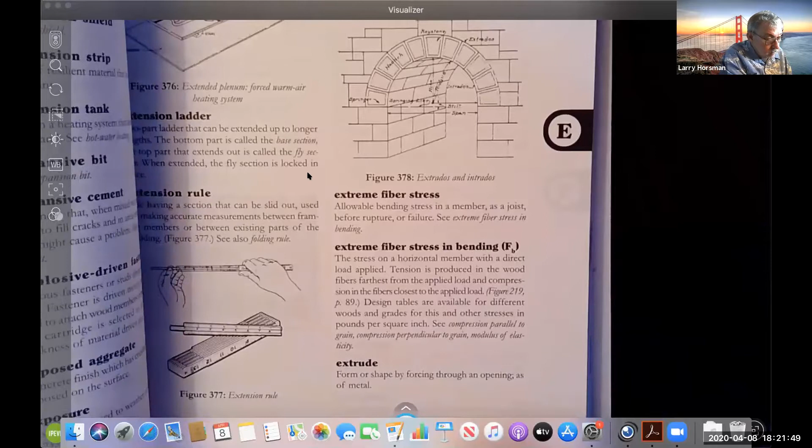Anyway. Okay, any other questions? No. Let me see. We got to get rid of this.

Get rid of that. Okay, can you see me again? Sorry about that.

So was this better or worse than the last time? I feel it was the same. The same. We're supposed to be making progress here. A little better. So, okay, I'll be sending some things out. I'm going to let you go a tiny bit early today, but you can provide me some feedback. We were looking for a little more structure. So if I'm getting closer, tell me, but really in terms of adjusting my aim and providing what you feel like we need to be getting to you, I need some feedback from you.